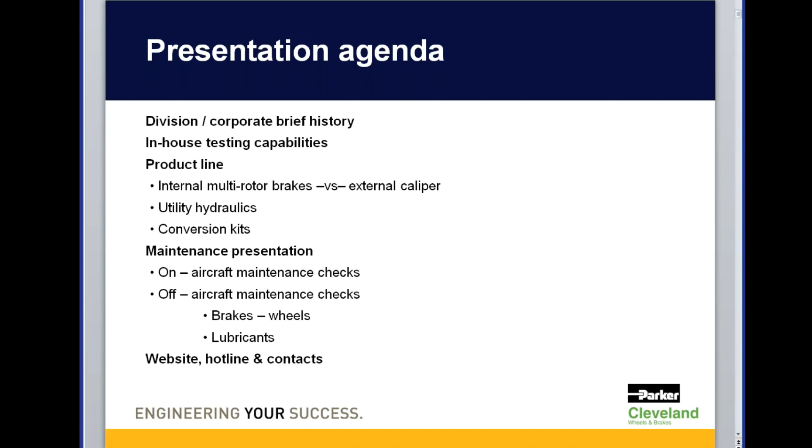We're physically located in Avon, Ohio, and if any of you on the webinar this evening are in the Cleveland area or will be traveling to the Cleveland area and would like to see our facility, by all means reach out to me and we'll be more than happy to take you on a tour and show you what we do and how we do things in Avon, Ohio, which is about 15 miles west of Cleveland, Ohio.

Okay, so jumping right into our utility hydraulics.

First up is our master cylinders. You can see there are two styles we manufacture: the reservoir master cylinder, and the non-reservoir style. That doesn't mean it doesn't need a reservoir, just that the reservoir is either located adjacent to the master cylinder or mounted on your firewall. With the master cylinders, you can buy all the individual components shown, and if they're PMA, you can buy the complete assembly or the seal repair kit to repair your master cylinders through any of our local distributors.

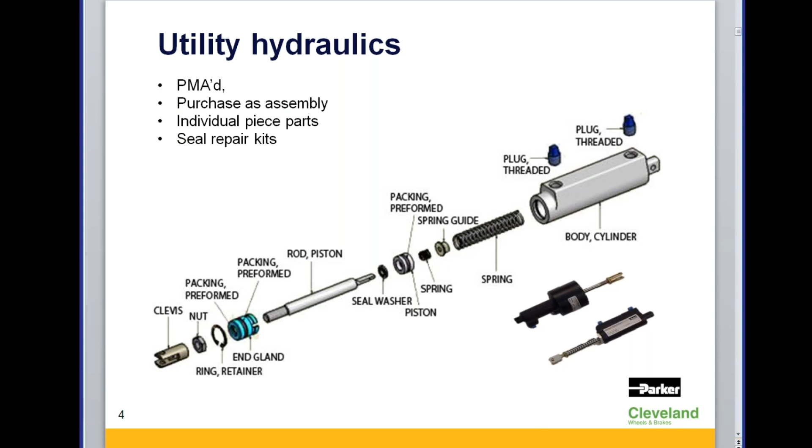The parking brake valve is very similar to the master cylinders. Same thing applies: if we own the PMA, you can get the complete assembly or any of those parts through any of the distributors, including the seal repair kit. We recommend changing the seals in the master cylinders and parking brake valves every 10 years. A lot of people let it go longer than that, but then issues begin, with more rubbing going on, metal to metal or aluminum to aluminum. To avoid that, changing the O-rings is a very good idea.

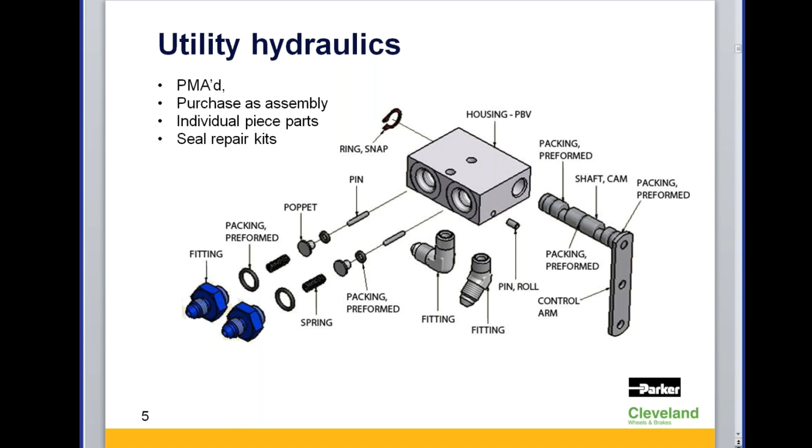Just to give you an idea of who we are and what our platforms are: 90% of reciprocating engine aircraft and 70% of general aviation aircraft, Cleveland Wheels and Brake has products on those various models. General aviation is our backbone, how we got started. We've also moved into the business aircraft sector, turboprops and light jets. In addition, we do a lot of work with civil helicopters, and on the military side, we have military helicopters, trainers, and UAVs.

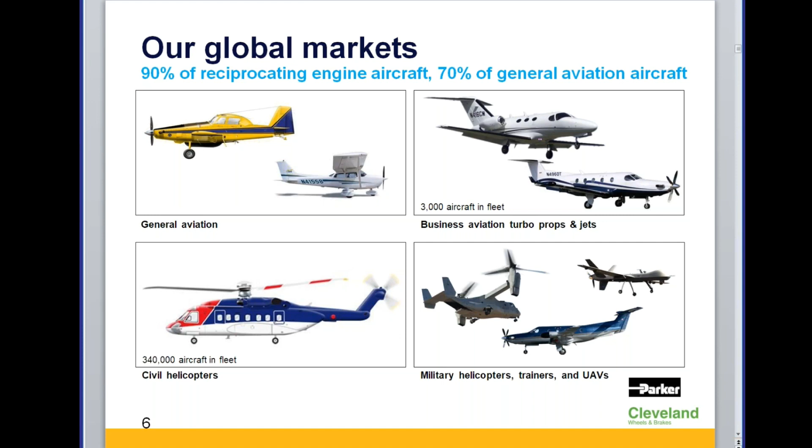For any of you that have our technical information, whether it's the product catalog, the maintenance manual, or the technician service guide, doesn't matter what you have on your shelf today, everything is available on our website. You can download the product catalog, maintenance manual, or the technician service guide at no charge. The only thing we print today is the technician service guide.

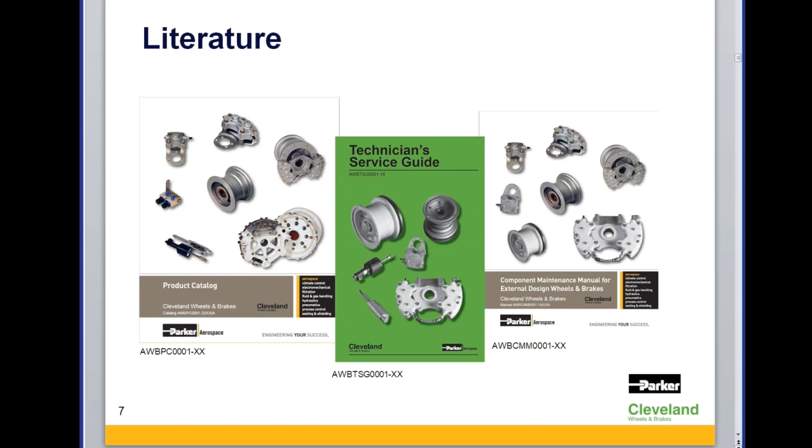For those of you that do most of your checking online, this is how you can get to our online services, by going to www.clevelandwheelsandbrakes.com. There's all kinds of new information there in addition to our product catalog, maintenance manual, and technician service guide. If you have questions, we have live chat from 8 a.m. to 5 p.m. Eastern Standard Time, and there's typically someone there to answer any questions. The only reason no one's there during the day sometimes is people are attending meetings. But there's all sorts of good information, such as service bulletins and product reference manuals. Just to learn more about our products in general, you can go right to our website.

As I was mentioning, on the website you can click on the product catalog, download the PDF, or go into the live chat section or expert insight, and check upcoming events such as Oshkosh next week. There will be a team of us there stationed at Hangar C, but we'll also be at KidVenture, where we're going to have a live demo every day. If you're there and want to stop by KidVenture and learn how to do your own disc and linings, you can come and we'll show you exactly how to use our products, tools, and a whole bit.

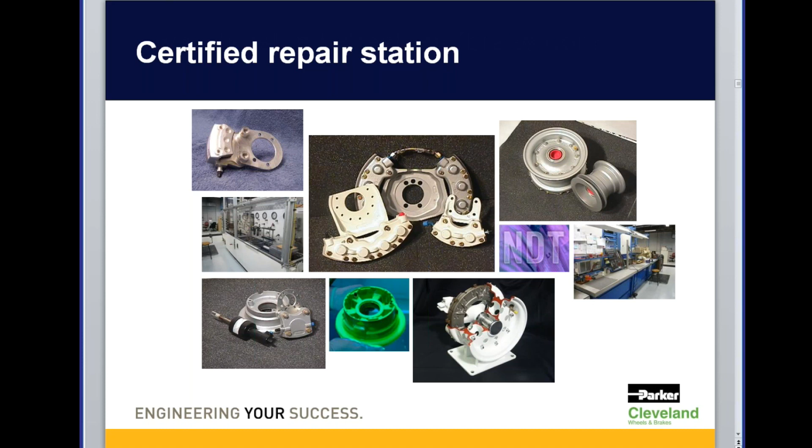On our campus, we also have a certified repair station. I know there are many people out there that love going flying but don't necessarily want to work on their own equipment, which is perfectly fine with us. In our certified repair station, we only work on our products, whether it's the wheels, the brakes, master cylinders, parking brake valves, or actuators. As long as it's our product, we will take it back, get you a quote, show exactly what we need to do and how much it's going to cost before we do any work, and make sure you approve of it. Once you receive the equipment back, it's ready to go onto the aircraft and back into service.

Here I'd like to take a moment, because this is an external wheel and brake, typically a wheel you'd see on a King Air. What I'm showing here is it doesn't matter whether the brakes are before or after the gear. It depends on what the OEM recommends, but it makes no difference to the braking system itself, because it won't affect the form, fit, and function of our assemblies.

Now you notice the two arrows at the bottom, pointing at the 5 and 7 o'clock position. If you have a brake assembly mounted between those two arrows, that's definitely not something we recommend, because undoubtedly, if you end up having a blown tire or a flat tire, that brake caliper is going to go right into the runway, and that's going to cause you more problems than good. You can damage the brake, the wheel, the gear. There's no telling what you can possibly damage, so you want to stay away from those areas.

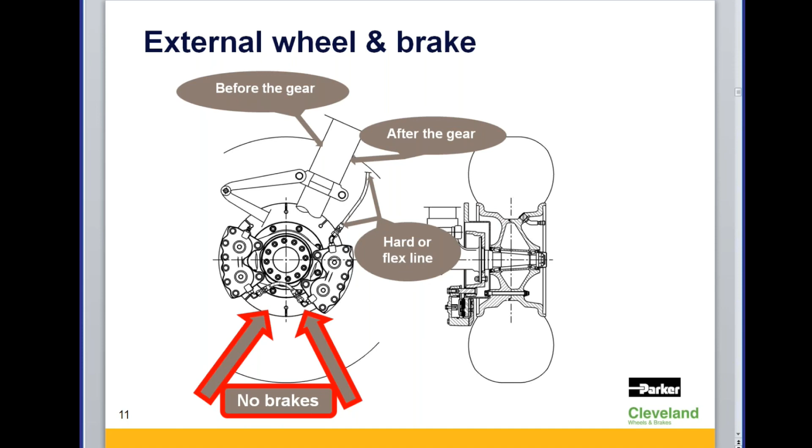Also, the hoses going up the gear leg, you want to make sure that's changed every 10 years, which is our recommendation from our sister division. On aircraft maintenance: general conditions, paint and corrosion, hoses and connector inspection, hardware and insulator inspection, disc inspections, dimensions and flatness, lining inspections and replacement, and lubrication of anchor bolts.

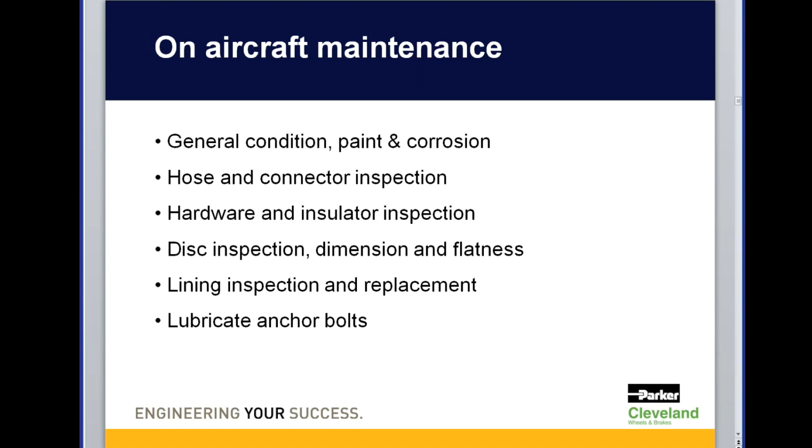So when we talk about corrosion, prime, and paint, all three can be covered under this one slide. Corrosion typically begins in the piston bore areas, the colors you see highlighted in copper there. In addition, the mounting holes going across the top of the cylinder housing can also get corrosion. Once that corrosion starts, there's no turning back, no turning back the time. It's going to continue and only get worse, so at some point you'll end up having to replace that cylinder housing. There are things you can do to slow the pitting and corrosion down, but nothing to permanently stop it. Our calipers are made primarily from a magnesium or aluminum housing.

When priming or painting those same cylinder housings you see on screen, you want to make sure the copper color areas are masked off, as well as the mounting holes going across the cylinder housing, because they're very tight tolerances. If you get any primer or paint in those areas, your parts - your pistons, anchor bolts, bleeder screw, fittings - will not fit back into place as designed, and will create more havoc than good.

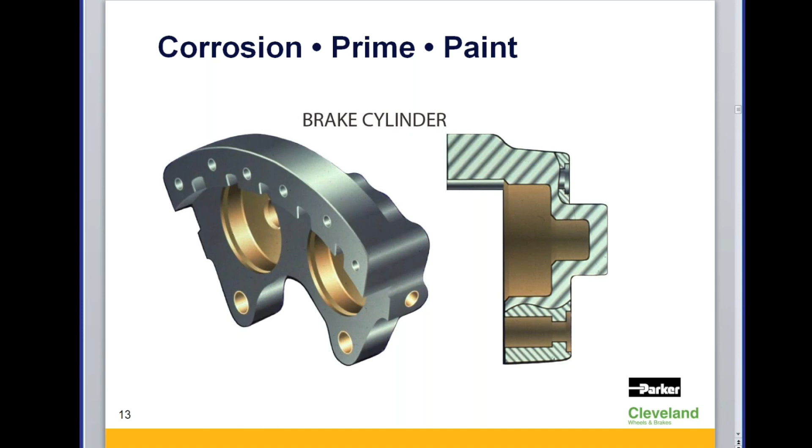Okay, off aircraft maintenance.

First up is our lining wall chart. It's a great tool. I have one in my office. As I fly around or visit different aircraft manufacturers, FBOs, or individuals in hangars, I see these lining wall charts. It's loaded with a ton of good information.

It shows you the exact size of the organic or metallic pad. So if you don't know the part number, all you have to do is pull the pad off the brake, stick it up right to the wall chart, and it will let you know exactly what that pad is. From there, you can usually back into the rest of the parts if you don't know your assembly part numbers.

In addition, it talks about our go, no-go gauges up in the right-hand corner at the top, and that's our minimum thickness gauge. It allows you to measure your linings. The linings are 100 thousandths, whether organic or metallic. If you wear it down past that gauge, you're most likely going to run into the steel plate if it's metallic, or the rivets if it's organic, and that's going to cost you additional money. So we're trying to prevent you from having to spend additional money.

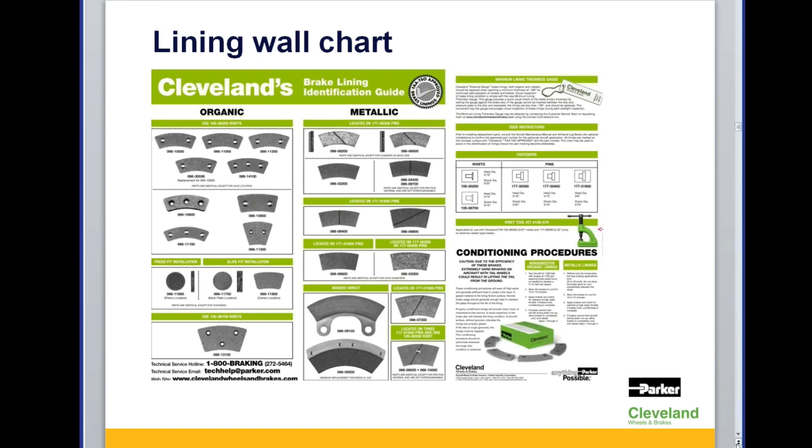This talks a little more in depth about the minimum thickness gauge. As you can see in the middle of the page to the right, it shows 100 thousandths minimum lining thickness, right on the gauge, so you don't have to guess. You just slide that up to the back side of the pressure plate or the back plate, and if you've got 100 thousandths or better still left on your pads, you're perfectly fine to go flying.

If you're getting close to that, it may be a good time to take a break from flying and do a little maintenance on the aircraft. You can also check the minimum thickness for the linings as well as the brake disc in our technician service guide or maintenance manuals.

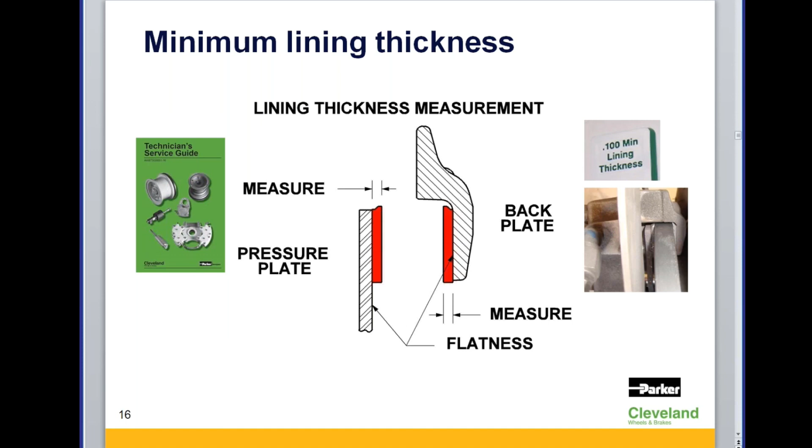Now this is an interesting picture, sent to us by a person working on the aircraft who couldn't quite figure out what was going on. The left side, as you can see, is very severely worn, to the point it's metal on metal in some places. The right side looks like the day they installed it. It's the same aircraft, same wheel and brake, correct parts, but what's going on there?

One possibility is that regular maintenance hasn't been kept up, so either the pistons are coming out of the housing and not retracting back, making a permanent drag onto the linings and disc, which wears them out much sooner than expected. Or it could be some FOD that got in there and caused everything to wear down much sooner than expected.

But what I want to explain here is if you see something like that, don't just throw parts at it. It should be a red flag, and you want to find out the root cause of that excessive wear on one side versus no wear on the other. So as a precaution and a heads up, make sure you find out the root cause.

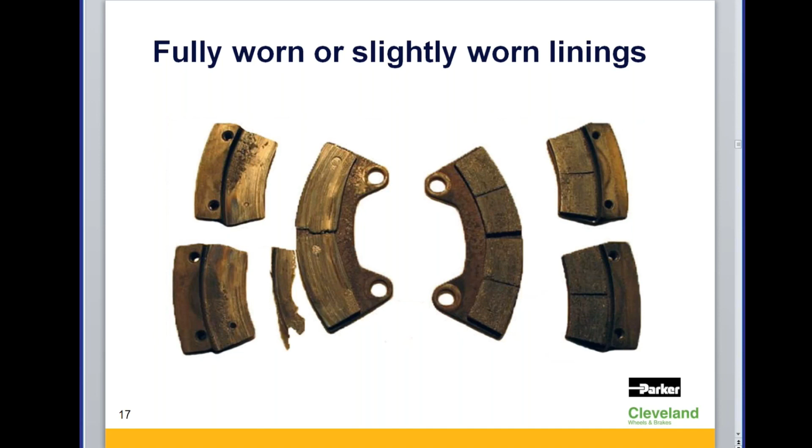Here, there's a few things that could be going on as well. You can see there's a piece of the lining missing, and there's also a chunk that's kind of cracked there. Normally that's contributed to a couple of things — one is over-tightening of the rivets. You don't think that's a possible thing to do, but it absolutely is.

Some of you may recall using the old punch and anvil style, where you take the punch and the hammer to make a good connection with the rivets, giving it a nice rounded touch on the other side so it seats well. A lot of times you can overdo that.

One of the other things I see that possibly is going on here is an overheating condition. The reason I say that is you can see on the plate itself there's some darkened color, and some weird things going on with the lining itself. Also, if you look closely at the edges of the lining that's still remaining, there's the fact that someone installed the lining but didn't bother to do the conditioning procedure.

Now, I'm here as a maintenance professional, and I want to see you get the longest life out of your products. But on the flip side, I'm happy to sell you products all day long. For our intents and purposes this evening though, make sure you do the conditioning procedures, because if you do not, you can truly expect a much shorter life on your disc and linings.

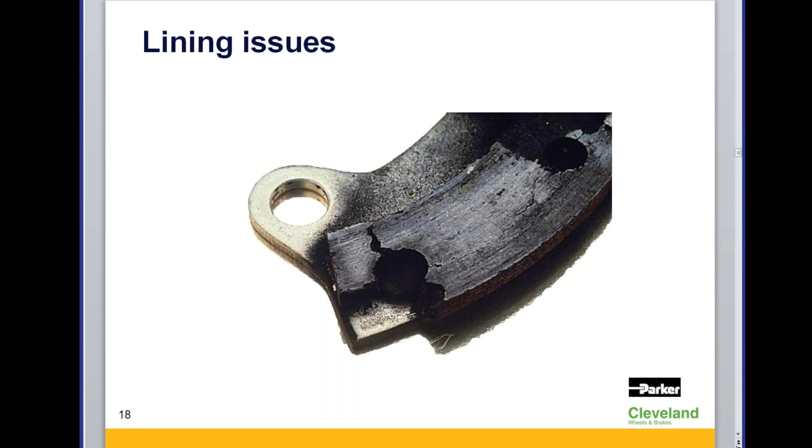All right, here we're beginning the cleaning process. We're installing our own linings with our own pads, our own backplate, pressure plate, and rivets. First, remove the old linings from the backplate and pressure plate, and make sure you clean the pressure plate and backplate off of all old lining material. If you don't, you're doing yourself a disservice by installing new lining over remnants of old material still on the backplate and pressure plate. So make sure you clean everything off - that's very important to the longevity of your parts as well.

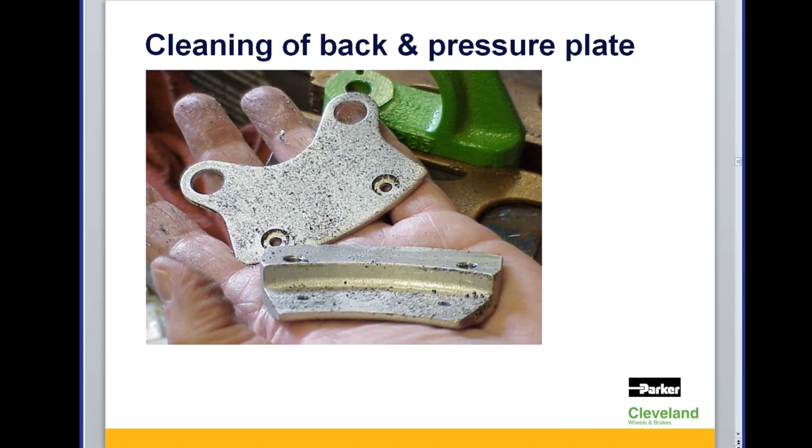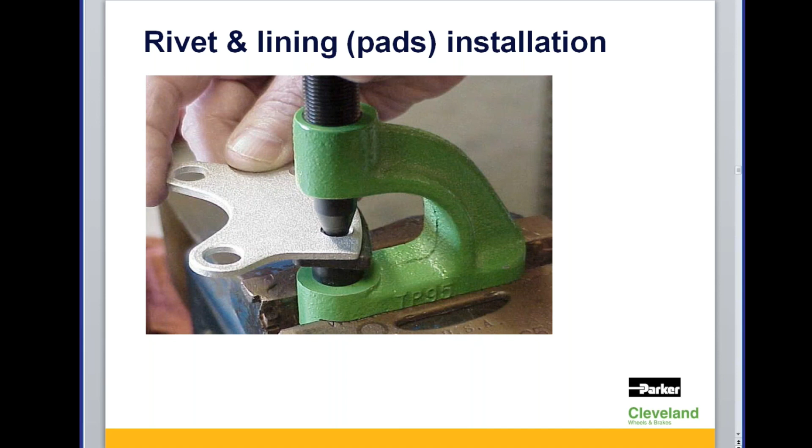Here we're installing the lining onto the pressure plate. There are two sides to the pressure plate: a flat side with a hole going through it, and the reverse side with a hole that has a recess, which you can see in the picture. The rivet head comes up through the bottom and you get the nice roll on the side you see there. That is the proper way to install your new pads onto your pressure plate.

Looks like there's one rivet firmly in place that isn't cracked on the pressure plate, and they're installing the second rivet as shown here. There's another thing you want to make sure of, which we'll cover in a minute, so I won't speak to that now, but they are installing that properly as we see it.

Vern, one tip, tell me if this is correct: I was always taught that using this tool, which is really inexpensive to get, especially if you're able to work with your mechanic and get them to sign off on your supervised work, these are pretty straightforward. The flat side of the rivet goes into the lining, and then you're rolling it over on the plate, tightening it down until it basically just starts to turn the plate and lining as a unit away from you. You tighten it until the tool, as you twist it, starts moving those, and that's the point to back off. Is that correct?

That is correct, Jeff. In addition, as you're tightening or squeezing the rivet to get a nice roll, when you install the first one you can gauge how much pressure or tension to put on that plate and rivet before over-torquing or over-squeezing it. Make sure that first rivet is in and that the lining is not moving sloppily against the other hole. If it's nice and firm and it lines up with the second rivet hole, then you've done yourself a good service.

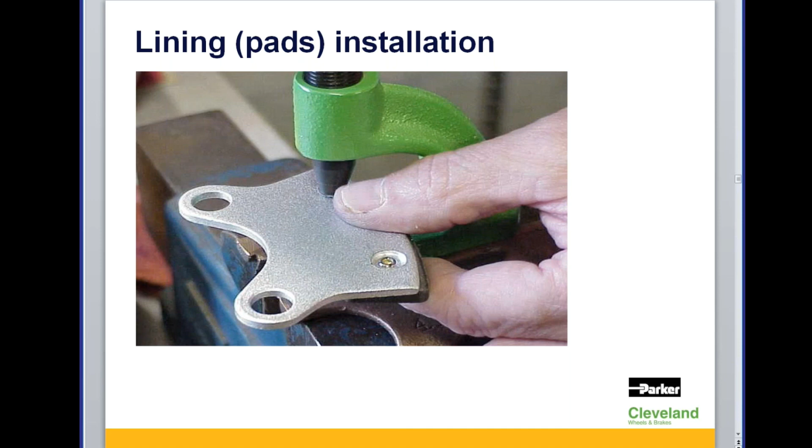Right, so basically you've got that second rivet held in place so you don't have to move anything at the same time as you're installing the first one. Exactly, for alignment purposes. Right.

Cleveland manufactures two different types of linings, very easy to know: organic lining, which you see on the right-hand side of the picture, and metallic, on the left-hand side. You can easily tell them apart. For organic linings, if you held the lining up and you see two or three holes, whatever the application calls for, and you can see out beyond the lining itself, that means it's organic because there's a hole going all the way through the lining.

If it is a metallic lining, you would hold it up the same way, but you won't see any holes going all the way through because it has a metal backing plate with the friction material installed onto the front side of that plate. When you reverse the lining, you'll see indents where the pin will sit, because the metallic lining uses pins as opposed to rivets. The organic lining uses rivets, the metallic uses pins.

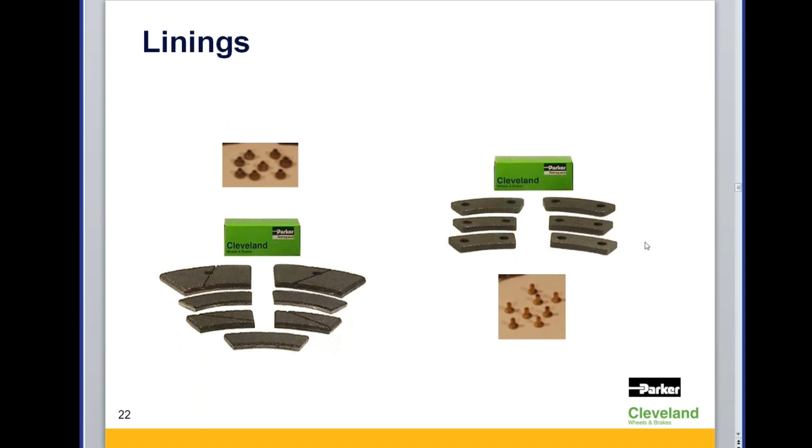So you want to make sure that if you are drilling them out, it gets a little scary, because if you elongate or oversize those holes, they're not going to do you any good. You need to go ahead and replace the backplate or pressure plate, whichever is damaged, or replace both if needed.

Here we're talking about riveting. As discussed over the last few photos, when riveting you're allowed up to 3 splits in a rivet head. Anything beyond 3 splits needs to be punched out with the riveting tool shown a couple slides ago, or with a punch, being very careful not to damage the holes in the backplate or pressure plate. You don't have to have any splits, but you can have 1, 2, or up to 3, and they should be about 45 degrees apart from one another.

If you get it all together and don't have any splits, there's nothing wrong with that, as long as you've got a nice firm squeeze onto the backplate and pressure plate—but not over-squeezing to the point of cracking, because then you've done yourself a disservice and have to redo everything all over again. So, only up to 3 splits on a rivet head.

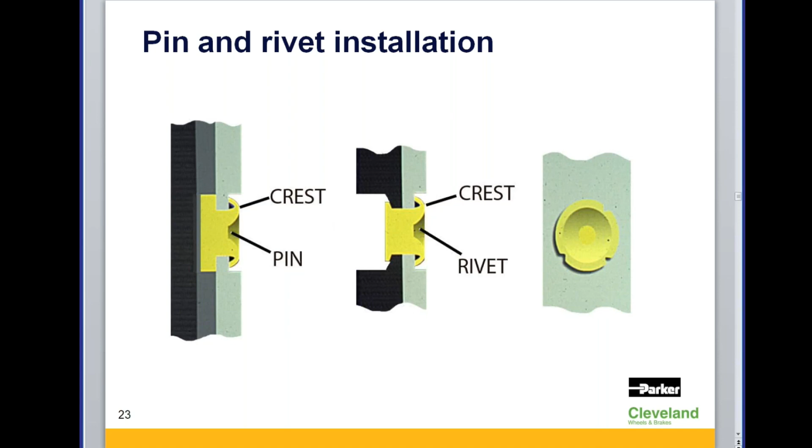Absolutely. You can buy those riveting tools for under $50, and it's well worth it — you have the tool for years to come.

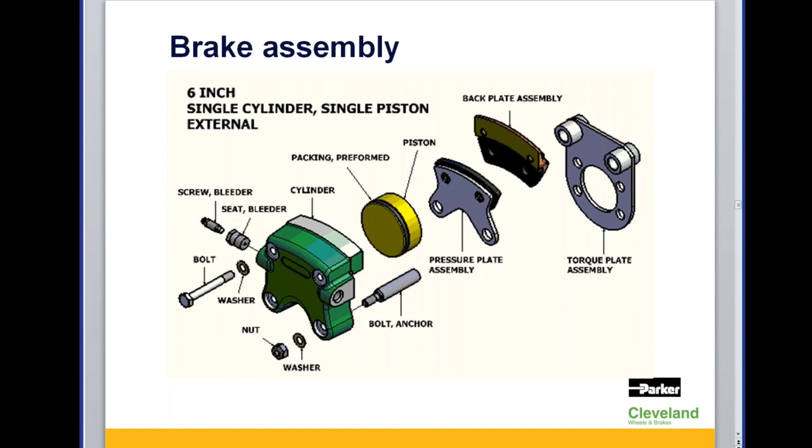So far as the brake assembly goes, this is the complete assembly. You've got your calipers, the pistons, backplate, pressure plate, torque plate, anchor bolts, nuts, bolts, and washers, and we're going to dissect this whole thing, talk about the parts individually, and be ready for any questions you may have.

Okay, first up is the torque plate. We have made changes to it. For years and years we had a steel torque plate with CAD plating over the top. Everyone knows CAD plating is not the healthiest thing for you. We're a green, environmentally friendly company, so we've gotten away from CAD plating and gone to a one-piece stainless steel investment casting. The ears used to be brazed on for the anchor bolts to slide through — now that's all one piece.

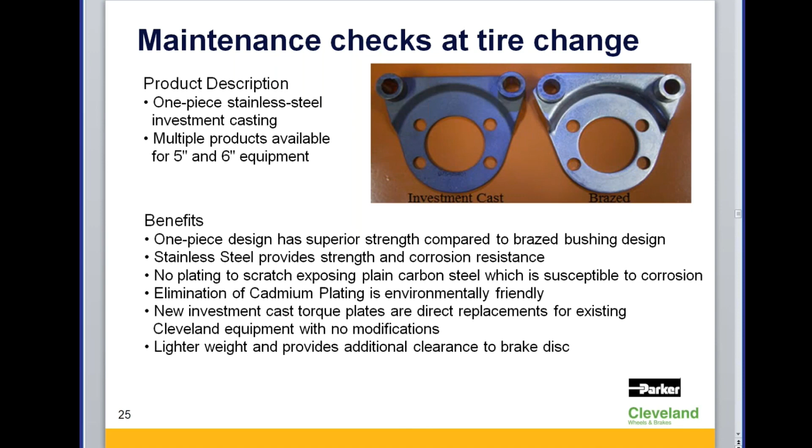We've done some very rigorous testing on this, and we know that you'll get years and years of service without having to replace your torque plates.

Pistons are usually pretty hardy — you can use them time and time again. You want to make sure you clean them up and make sure there's no pitting or corrosion setting in. If you have a piston with a friction spring on it, make sure that right around that friction spring area there's no damage to the tip of that piston. If there is damage there, most likely there will be damage to the inside of the brake cylinder housing as well.

With both of those being damaged, you really will need to replace both, because it's very vital that the friction spring is in there and sits in the proper place inside the cylinder housing so it doesn't move side to side or possibly cock on you. So you want to be very careful of that.

If you have a piston that has an insulator on the front side, make sure that insulator is intact so you'll make it to your next annual without any difficulties. If the insulator is partially missing or you don't think it's going to make it to the next annual, replace it. And first and foremost, anytime you're doing a brake repair or brake overhaul, make sure you're changing your O-rings.

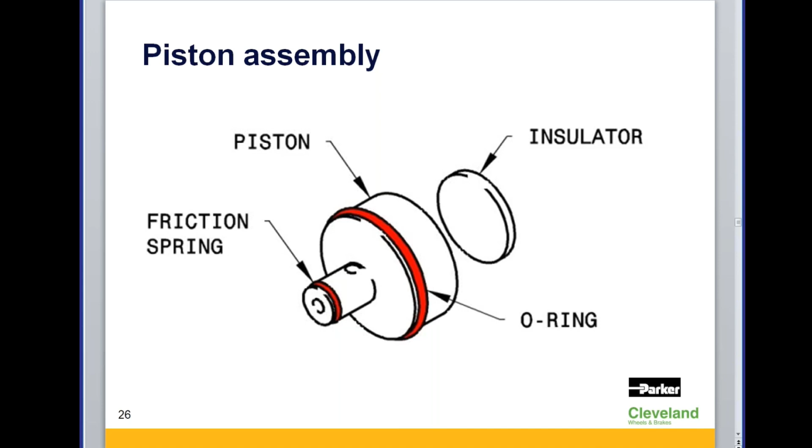Cylinder deformation. One of the things that's really interesting is how you get cylinder deformation by over-torquing your bolts onto the housing, and it makes the back plate concave inward. You can easily tell what's going on when you look at your lining and you've got wear on the outboard side or the inboard side versus the other side, which has a lot more pad left. That tells me that you do have some crushing.

One of the things you won't notice is if you have a crushed cylinder housing or cylinder deformation with worn linings or a worn brake disc, it's never going to come into play at all. But once you change out either the disc or linings or both, you're going to go from having an aircraft that you can push back into the hangar without any problems to an aircraft where the wheel will not even turn, and that could be some of the reason why—the cylinder deformation or the crushing around the cylinder holes.

So if you do encounter cylinder deformation, the only thing you can do is actually replace the cylinder housing itself. I see this in the field all the time. The last thing you should be doing when it comes to any of these things is just going by feel on these assembly bolts.

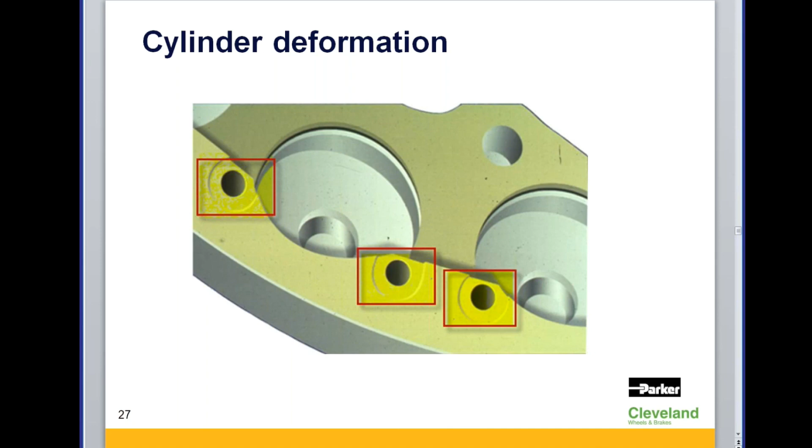This is one of the examples we've heard. A gentleman called the tech line one day, and just as the same scenario I explained, he rolled the aircraft into the hangar, decided they wanted to change the disc and linings. No problem, shouldn't have been. He changed the disc and linings and found that the aircraft would not roll at all. So he calls and says, hey, have you guys ever seen this? What do we need to do? What did we do wrong? You didn't do anything wrong, but during the whole course in life of the housings, things happen.

You can see on the top left-hand corner, around the cylinder where it mates to the backing plate, there's some crushing there. Not a great deal, but there is some crushing there. So that is a concern, obviously.

The pressure plate, if you have a pressure plate, make sure you put it on a registered flat surface and take your index finger, go around each corner. If it lifts up, that means it's no longer flat. So you have an option: either flatten it, or replace it with a new flat torque or pressure plate.

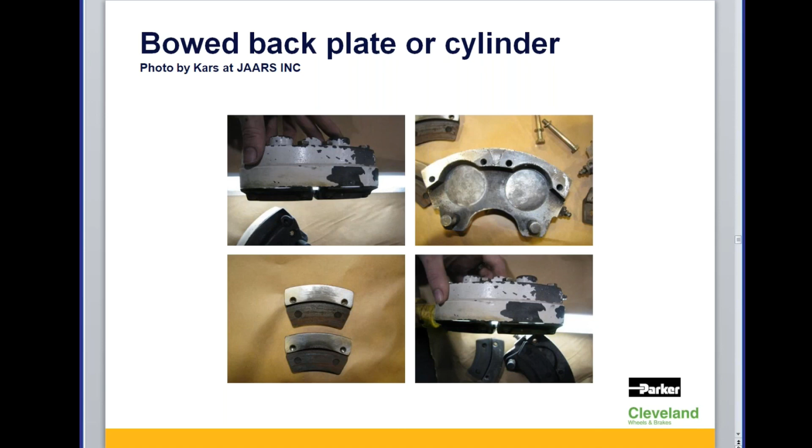One of the questions I like to typically ask the audience, looking at this visual here, is this something on a cylinder housing that is serviceable, or would you just scrap it out and put it on your desk as a conversation piece? Personally, I would put it on my desk and have a conversation piece about it, because you can tell there's all kinds of issues.

In addition to corrosion, you've got crushing around the bolt holes. You even have your anchor bolts that are corroded and pitting inside the piston bore area. That's only the mild stuff. Now, when you look at the two opposite corners of the cylinder housing where the bolt holes go through, you can actually see material missing.

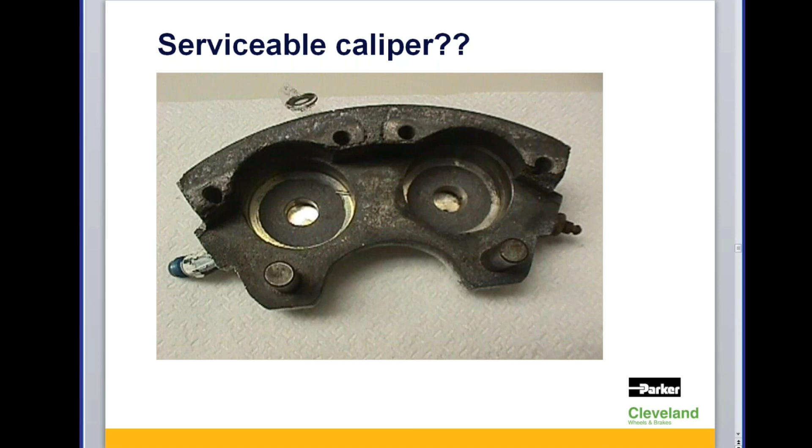And the question came into us whether we should give them written permission to put this back into service, and there's no way in the world that Cleveland's going to support that. We're going to tell you to replace the housing, because that's absolutely the worst cylinder housing that you want to see, and you don't want to see that out in the field. You want everyone to be safe. So the recommendation from us to the technician that called in was to replace it.

Well, when we send them out from the factory, they are completely dry. Understanding over the life of the cylinder, you're going to need some help with things to slide a little bit more freely. So here's the recommendation on that: no oil, no grease, graphite or dry slide on the anchor pins. That's all, nothing else. Or something that goes on dry and stays dry.

Or if it goes on wet and it dries, do not install that into the cylinder housing until it's completely dry. That's why we only recommend dry slide and graphite. We know exactly what that's going to do. That's the only thing that you need on the anchor bolts. If you don't have that, clean the anchor bolts up and put them back into service without putting anything on them whatsoever.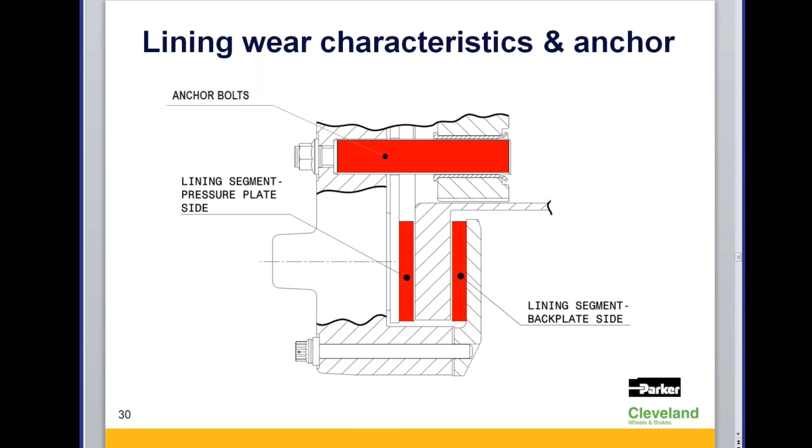All right, getting towards the end of the brake assembly housing. So once you've gotten to the point where everything is reassembled, you're now torquing everything down. You don't want the Popeye effect. We give you the tools such as the maintenance manuals, technician service guide that have all the torque values in there. Don't make up your own, because as we saw earlier, you don't want to over torque those cylinder housings, because that's going to cause crushing around those bolt holes on the housing itself, and that's only going to cost you additional money. So follow our recommended torque guide and torque it properly.

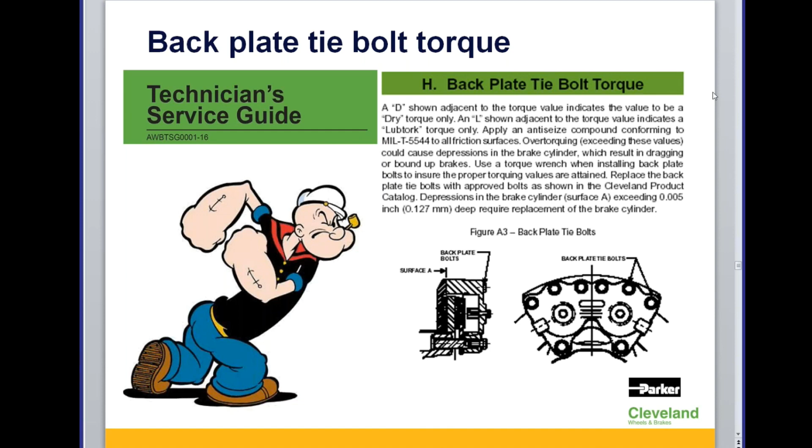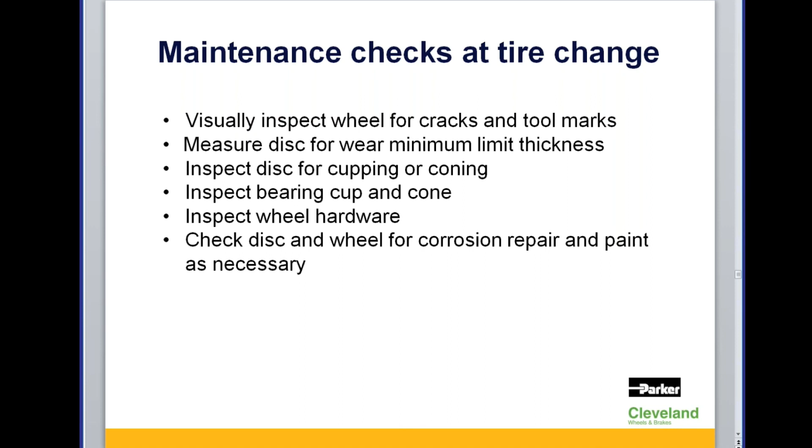All right, so we're jumping right from the brakes into the wheels. Maintenance checks at the tire change: visually inspect wheels for cracks and tool marks, measure disc for wear minimum limit thickness, inspect disc for cupping and coning, inspect bearing cup and cone, inspect wheel hardware, check disc and wheels for corrosion and repair and paint as necessary.

First and foremost, anytime you're working on an aircraft, you're working around the wheels, no matter what - at least one call annually we receive is from someone beginning to work on wheels who took the axle nut off the aircraft, slid the wheel off, and began loosening the bolts. In many cases on our wheels, we have 3 bolts holding the wheels together, some cases 6, but in most cases 3. Once you begin loosening those bolts and you haven't deflated the tire, it becomes a serious issue for not only you, but the people around you.

Again, safety is our biggest thing. We practice it in our shops, we practice it in our office, and we want to keep all of you that are working on your aircraft parts using our equipment to be safe as well. So make sure you deflate your tire before doing any kind of maintenance checks.

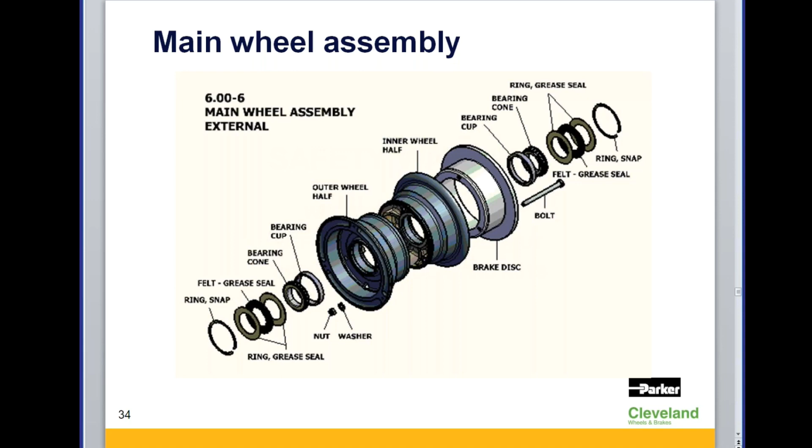All right, so on the wheel assemblies, you have wheel halves. You have the inboard, you have the outboard, you have the brake disc, you have your bearings, you have your grease seals, you have your snap rings, you have your mounting hardware - nuts, bolts, and washers - and that's what makes up a complete main wheel assembly. We're going to do what we did with the brake assembly, dissect it, talk about each individual component separately.

Tie bolts: make sure that if you have tie bolts that have a countersink washer, that countersink washer should always go towards the head of the bolt. Two, make sure when you're torquing the bolts down, whether it should be dry torque or lube torque - look in our maintenance manuals or technician service guide. The information is there. Those are key things for that.

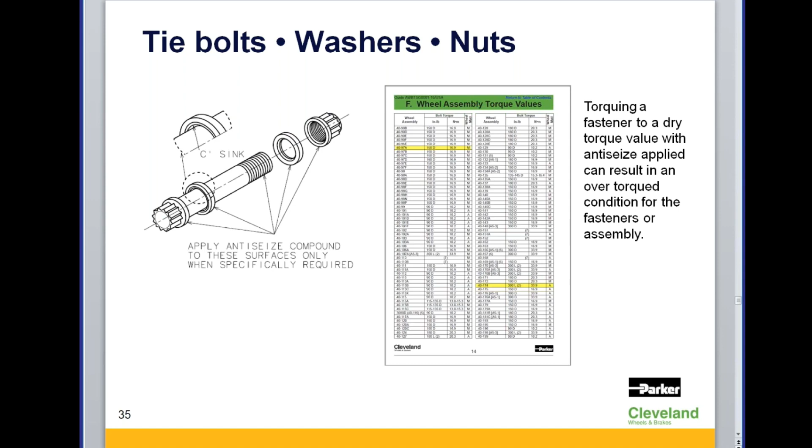Grease seals. Molded grease seals are now replacing the felt seals. We have only maybe a handful of wheels that still use the felt seals. In many cases, you go to replace the felt seals and look at our product catalog, you're not going to find the felt part number, only the molded seal part number, which is a much better option than the old felt style that goes in the wheel. The molded seals work out so much better.

They keep contaminants out, they keep the grease in. If you're washing your aircraft and washing your wheels, you're still going to have to monitor that. And if you're washing the wheels too well, then you're going to have to repack your bearings as well.

This is a great point for everybody. If you're looking at an inexpensive upgrade that should be done the next time you go in for annual, the idea of getting rid of those old felt seals, if that applies to your aircraft, and switching over to molded seals can really help save your bearings, the races, the inside of those wheels. It's a great upgrade. You should talk to your shop about it if you don't do it yourself.

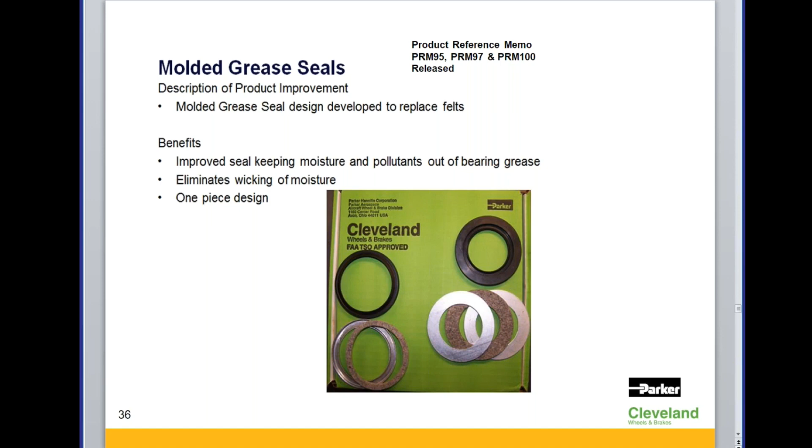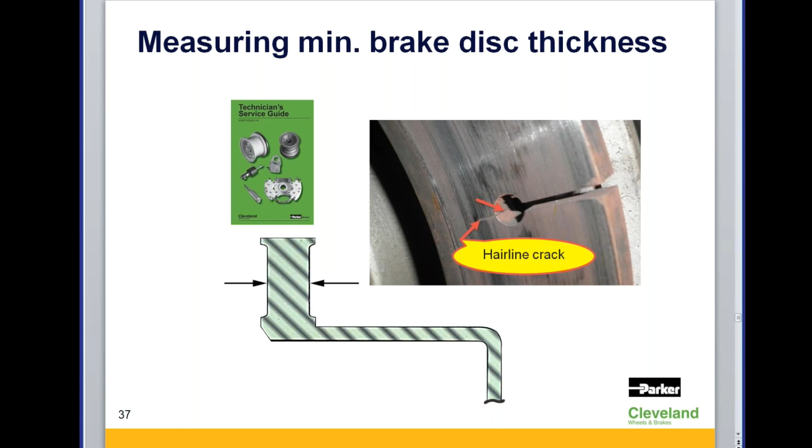This may not pertain to the folks on the webinar here, but if you have an aircraft with a disc that has slots in it, heat relief slots as we call them, make sure they don't have any cracks in there. Even hairline cracks are reasons for concern. There are a few exceptions where cracks are allowed, but in 98% of the brake discs that we manufacture, cracks are not permissible.

Coning, 15 thousandths doesn't seem like a whole lot to be calling it a cone disc. But if you take this and look at the larger picture, if you have a cone disc and worn linings, it's not going to really matter. If you have a cone disc and you install new linings with that cone disc, now you have a bit of an issue, because when you torque everything down, you're going to have a binding effect. So what do you do with this cone disc? Absolutely nothing. Get rid of it.

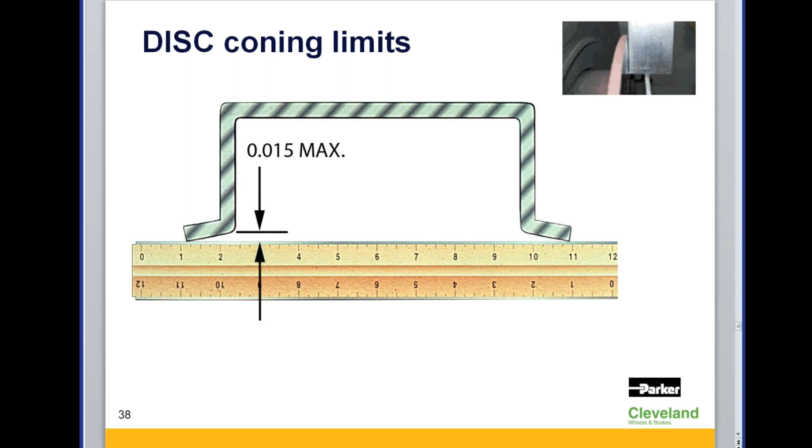Get yourself a new disc, because there is no repair. Replacement is the only thing you can do with the coned disc, 15 thousandths or more.

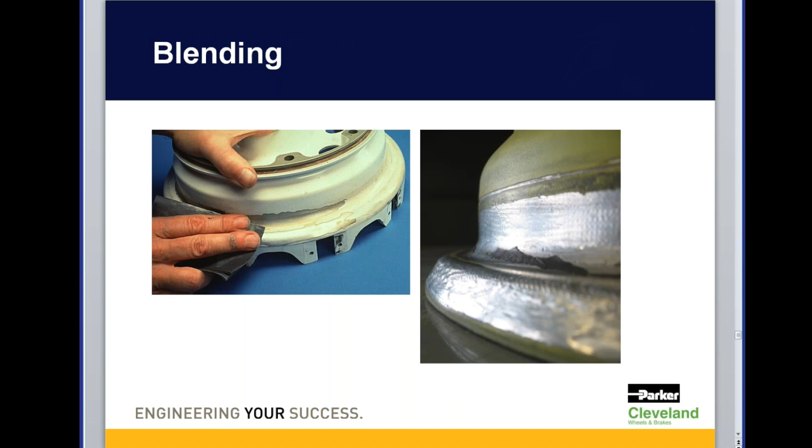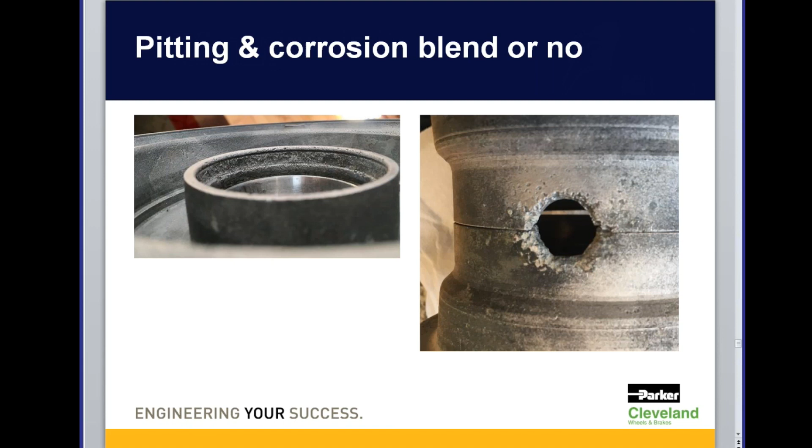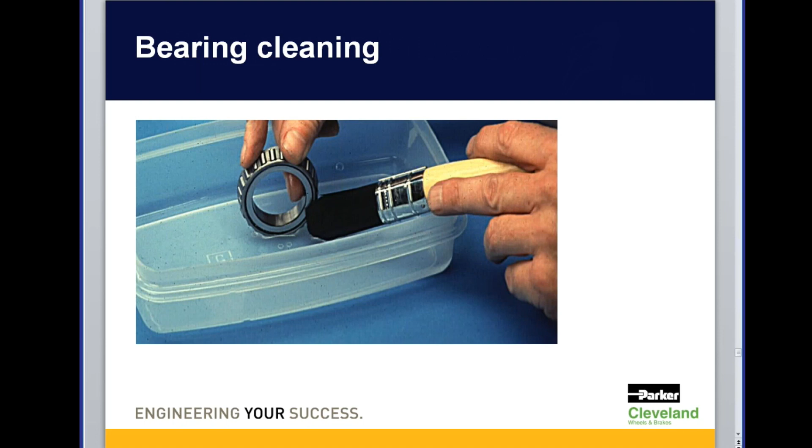When it comes to greasing the bearing, there are many different types of wheel bearing greases out there. We use Mobil SHC100 Aviation across the board, unless we're talking amphibious, and then we use a green grease for the amphibious. You can use Mobil 28, Aeroshell 22, or Aeroshell 5, but do not ever mix any of the greases together, because that will cause you problems and possibly prematurely fail your bearings.

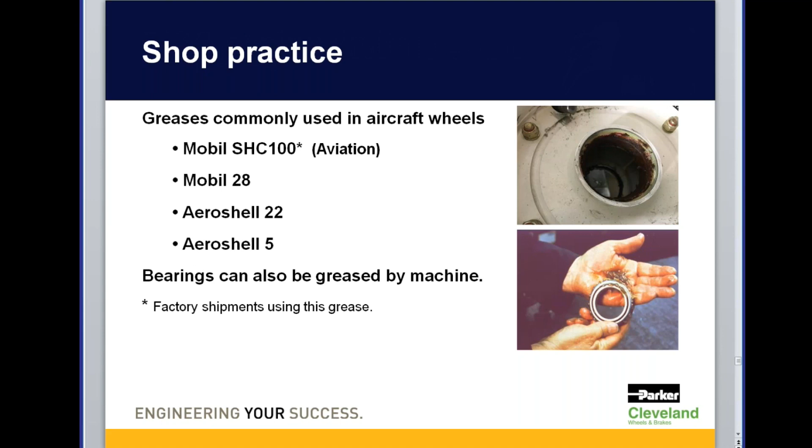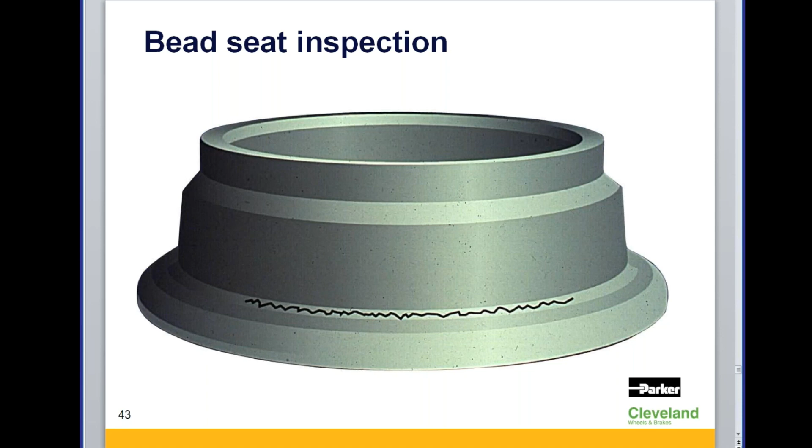All right, cracks. Yes, the crack that you see there in front of you is very excessive. If it's only a minor crack, it doesn't matter. A crack is a crack. A crack's never going to get smaller, it's only going to grow, and it's only going to cause you problems. So once you see and have established that crack, whether it's through NDT, a visual, eddy current, whatever the case may be, make sure that cracked wheel half is replaced.

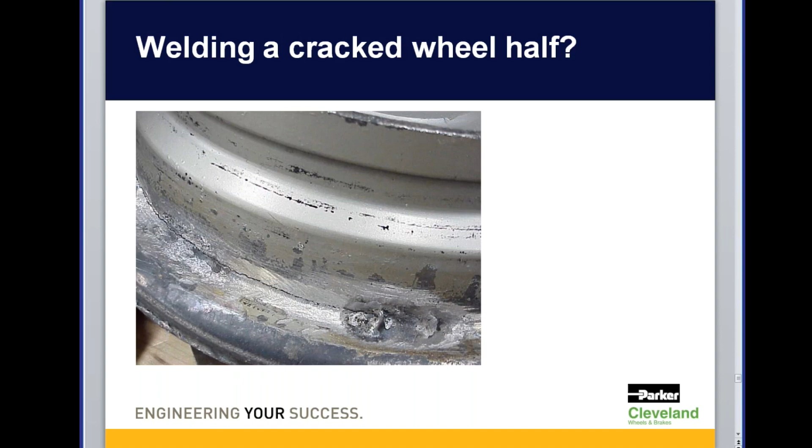That's certainly a no-no. Nobody's going to sign off on that, and it definitely falls outside of the safe category. Get rid of it, get yourself another wheel half.

Again, just like the brake assemblies, make sure you follow the proper torque values for your wheel assemblies as well. It's vital to the life of the wheel assemblies, and it makes a difference whether you torque it to 90 inch-pounds or 75 inch-pounds, whether it's dry torque or wet torque. Please follow the manuals.

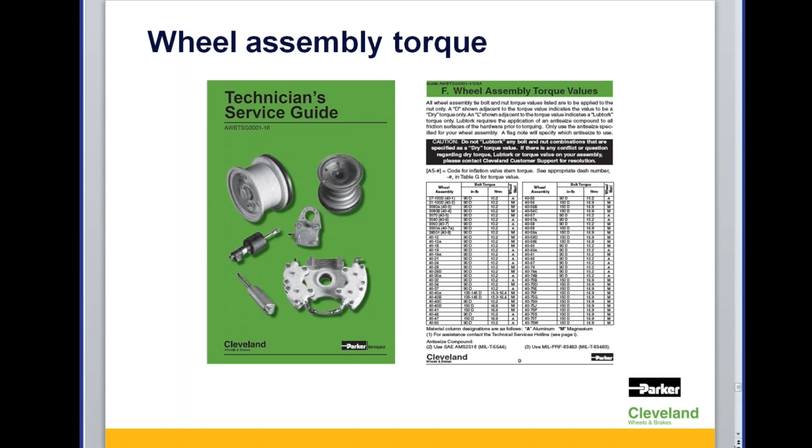Organic is the type with holes going all the way through the lining, and metallic is the lining that uses pins, where the hole does not go all the way through the pad, and it has a metal backing plate. Doing the wrong conditioning procedure will definitely land you in trouble.

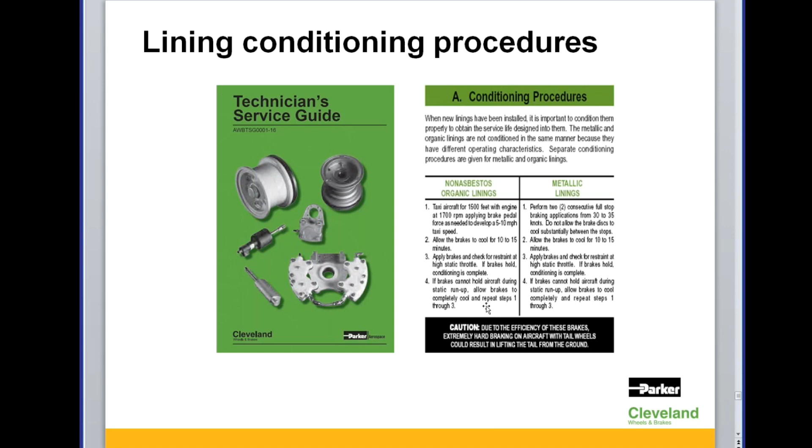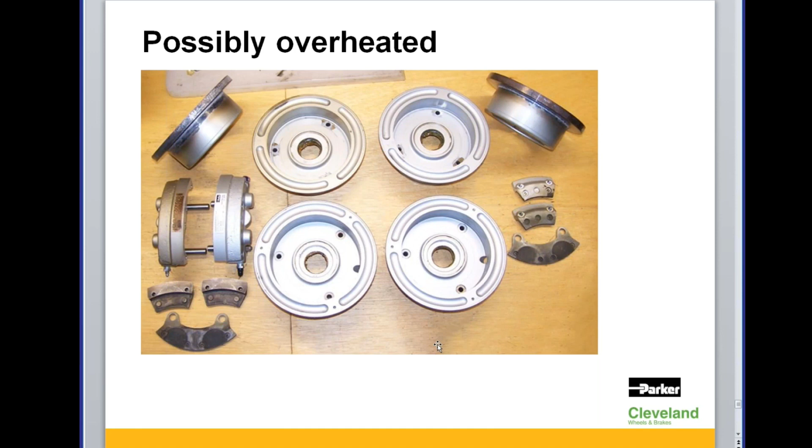Wow, you're talking thousands of dollars on that. And you'll notice from those previous steps that Vern showed, I don't know if you can easily read it, but one of the most important things on that organic lining steps is allowing it to cool for 10 or 15 minutes. And 10 or 15 minutes waiting on the ground is not something people are always very patient for, but it is incredibly important to do before you proceed past that.